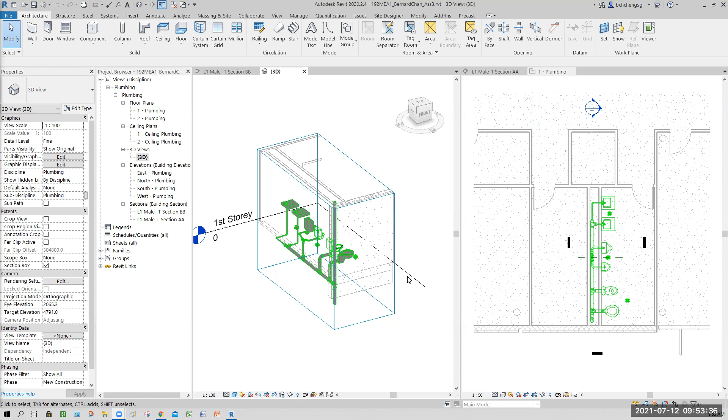Okay, so first thing first, I'm going to the view as per normal. So from here, since this urinal is done, I try to use this, or if not, this one can be deleted.

Okay, so these two guys, what is a space? Of course, normally when you plan all this adjustment, ideally it's center. So at least when you prepare the pipe segment, the section, when you cut, at least you can cut the same length. It's easier to manage that way. Normal kind of wastage lah.

Yeah, okay, so 340. So RP 340 divided by 2 is 170. Okay, so I'm going to offset 170 somewhere in the center.

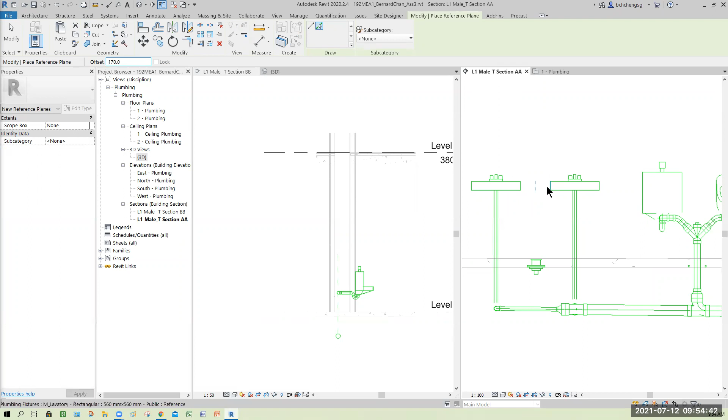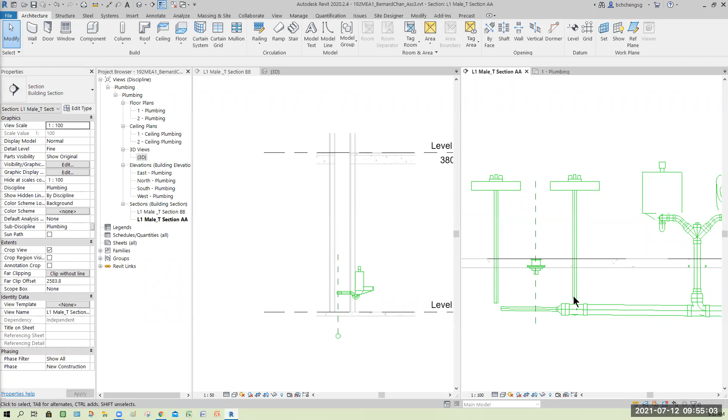Yeah, like that. Okay, now this part here I'm going to delete away because not required. This part here I'll maintain, but this connection here, adjust it, delete. Remember, we don't need that. So here, hopefully you guys can understand how this thing is connected.

Well, while you are dragging it, remember, not horizontal. Fidget a bit, you should get something like this. It says parallel and nearest. So from there, you get to maintain. The important thing is what? Your slope percent.

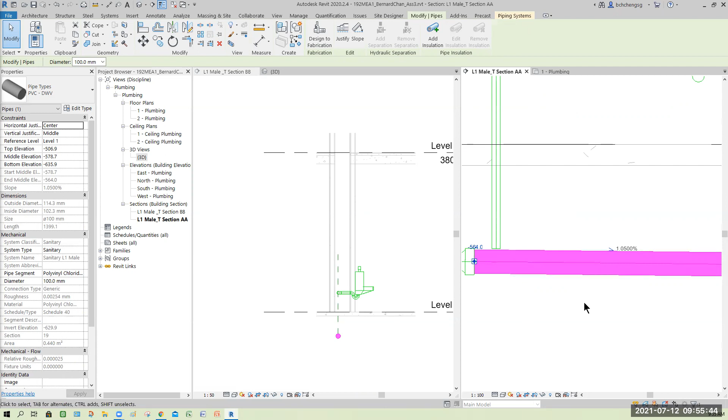Okay, slope percent achieved, that's good. Now sometimes if your pipe or this connecting fitting is too near, you might not be able to get the pipe size created. Okay, so all this you can shorten it.

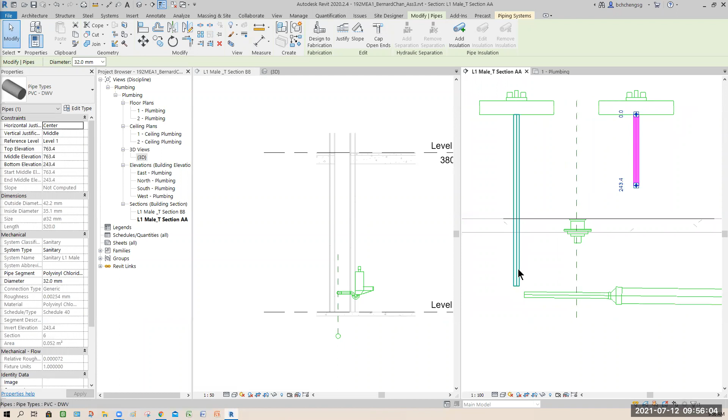Okay, so center to center. If I try to draw my pipe from here, okay, and see can I make it? See, this pipe is pipe size 32. Okay, so 32. If let's say the space allowed, maybe I'll get the size one size bigger. So this is good.

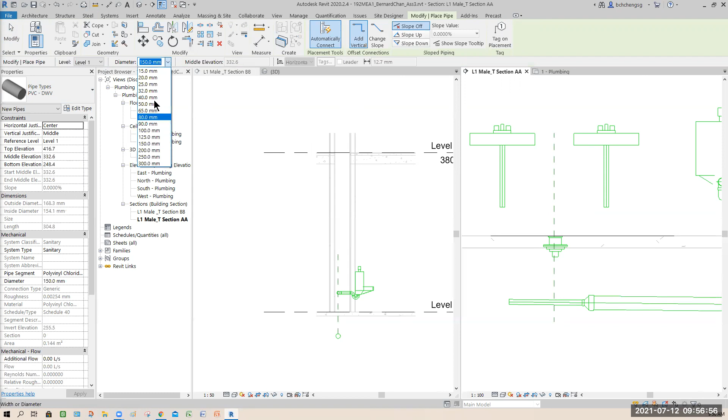40. So Santos, you tell me it's 40 just now, right? Yeah, good. So I'm going to get the pipe, which is the pipe. Where is my pipe? Here. Okay, PVC 40. Pick a point and you draw it.

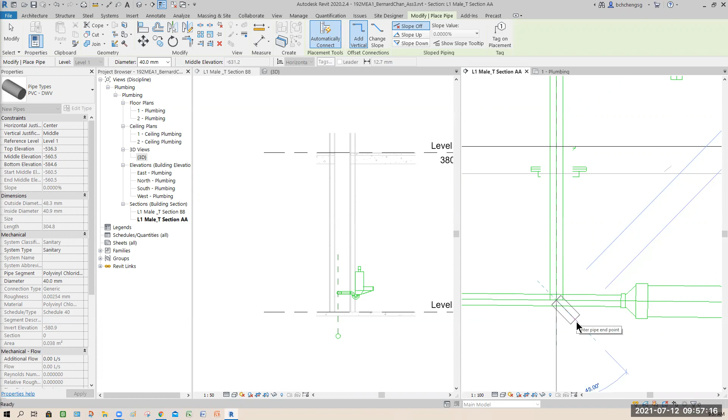Slope off. Slope percent 0. See, this is what I mean. When you draw like this, you can snap. I just don't get it connected. See, weird, right? It doesn't want to work. Interesting, right? Never mind, let me delete it away.

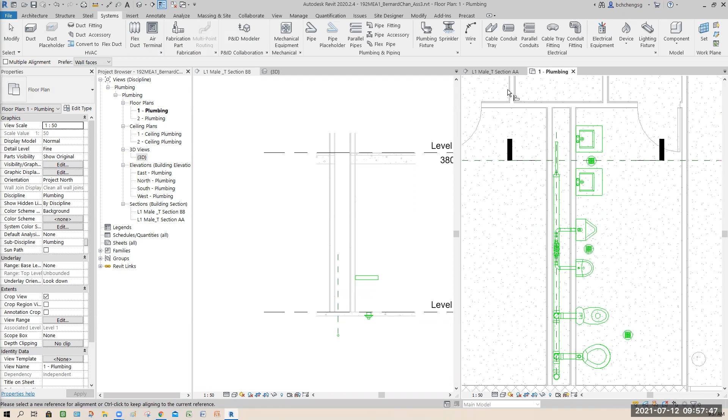Let's go to the section and change it. So from here, I'm going to align, AL, reference align. Go back again. Right through here. Now should not be a problem. Hopefully, it's still pretty tricky.

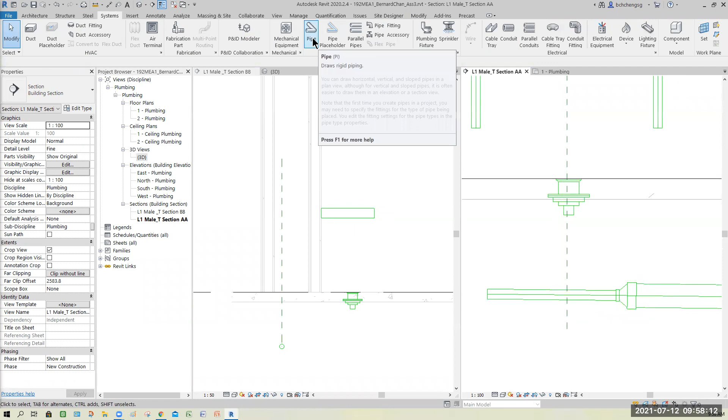Now, what is this pipe size? 32. I'm going to change it to 40. Then draw from here. Pipes 40. Highlight the view. Snap it. Hopefully that is connected. See, it works.

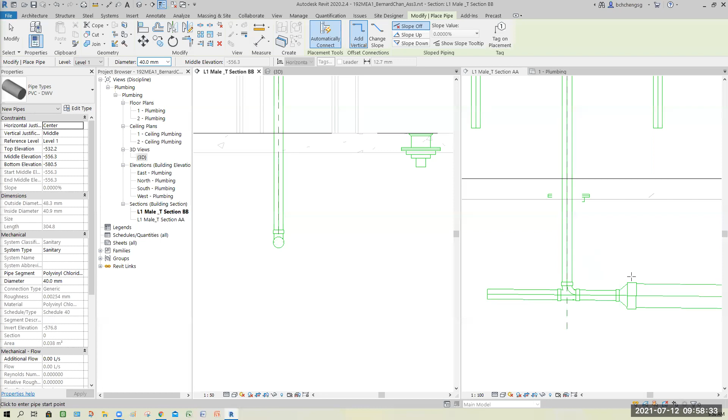Actually, the section AA is much more accurate, is better. So I don't know why. Of course, here you can change wider, also can. Why? You are supporting the flow smoother that way. But of course, sometimes it becomes too many pipe sizes. So it depends.

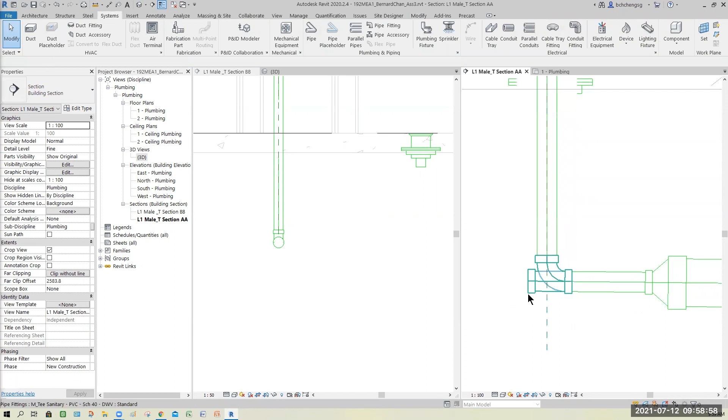All right, so done, no change. Delete this away. And of course here, remove your connecting. Unless you want to cater for expansions and so on.

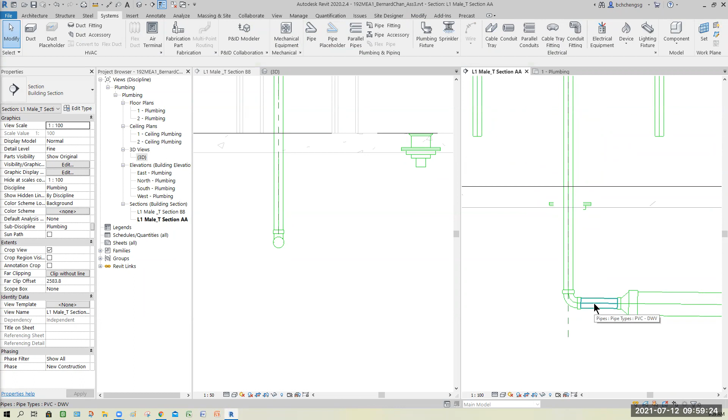Okay, so if you decide to change this in between pipe, maybe bigger, I'm okay also. Because the flow is supposed to be small, bigger, and bigger by right lah. But sometimes due to the cost, also too many pipes also create problems. Why? You have a lot of adapter, reducer, all these things.

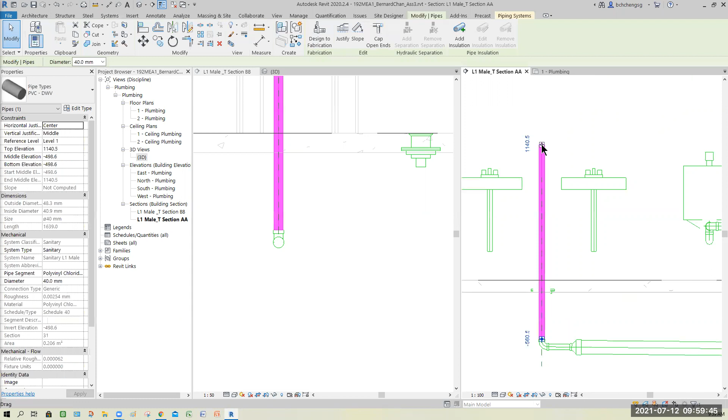Okay, so this is good. Lower a bit. Yeah. Then now I change back to one of it. Okay, so align. Am I too fast? Okay, right. Yes sir, okay.

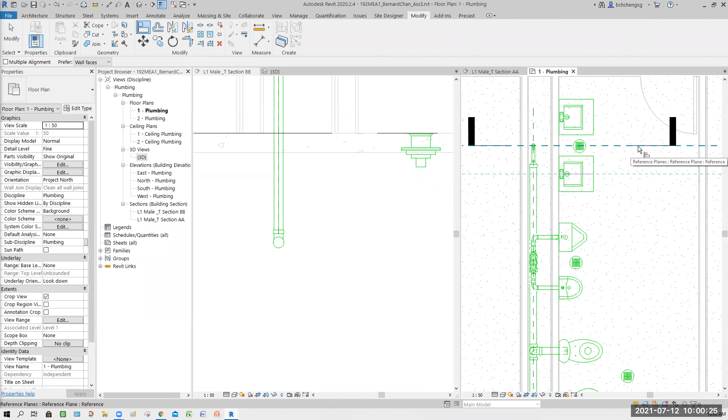So I'll go to modify, align, set the center, align my section line. But I can see sometimes it's quite difficult to adjust. So must use what? Tab key. Tab key is to toggle your selection. Remember, so once you set it correctly, then things will be easier. See, now connections is back.

Okay, once it's done, now you decide to plan. Okay, so first thing, you must have a P trap. So P trap, whether too high up or too low, that's because it depends on the accessibility and the view.

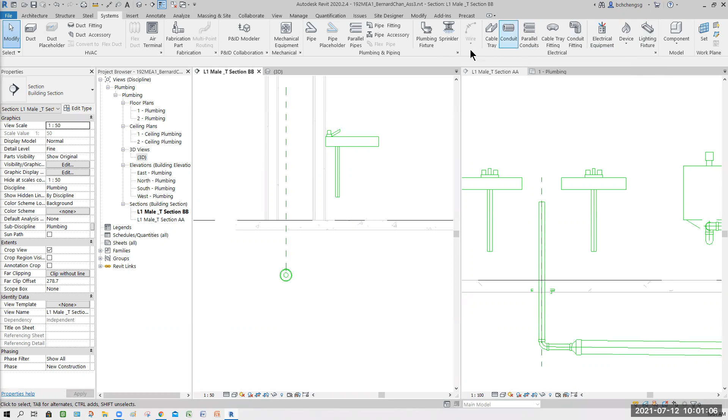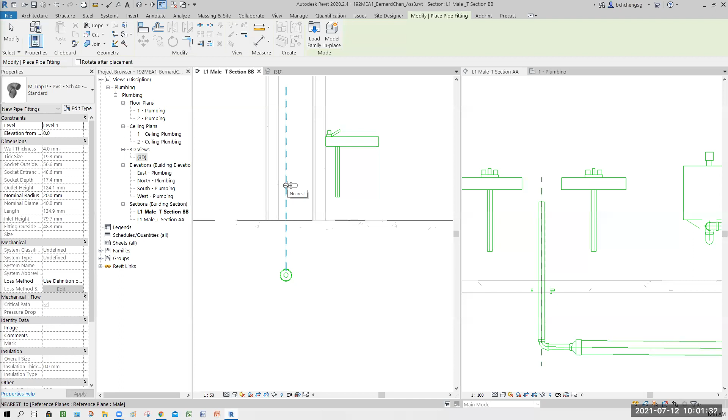Fitting, you need to select is the trap P, which is our trap P. In other countries, they're using this, like Japan, US, and so on. I think US is more or less direct. Japan has a trap, a U. Ours really is a P. Singapore one is a P. You see, the US one is an S itself. Yeah, so different countries use different stuff.

Okay, all this is not so-called right or wrong, you just set your practice. As long as it doesn't cause any choking, then it's okay.

When you start to adjust it, it cannot be too high up. Like the urinal, we adjust higher because there's no cover. Normally for a Singapore tap, like the vanity type, they have a wooden casing or some other precast kind of component they can conceal inside.

In that case, you've got to adjust the height because of servicing. How are you going to service it when there's a blockage?

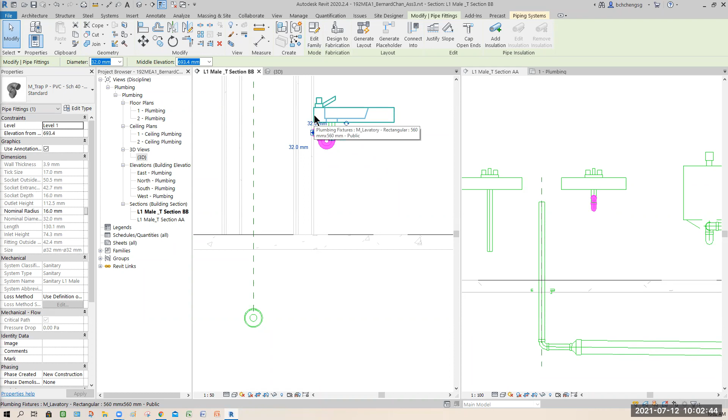So if I do something like that, that is too high up, right? Because remember, behind your sink there's a mounting bracket to mount the sink on the wall. So if you go too high up, you can't adjust it.

So this trap should be somewhere lower, like this. Yeah, it cannot be too high up.

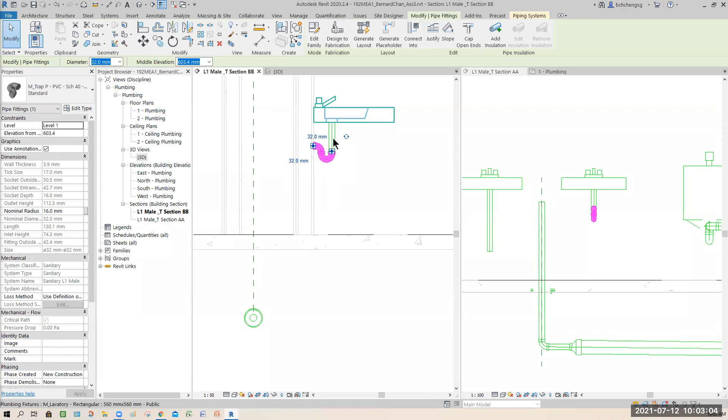Okay, take note that all this is estimated, right? At the end of the day it depends on the connection, because I didn't really measure it. But to me, sometimes you build things must be logical sense.

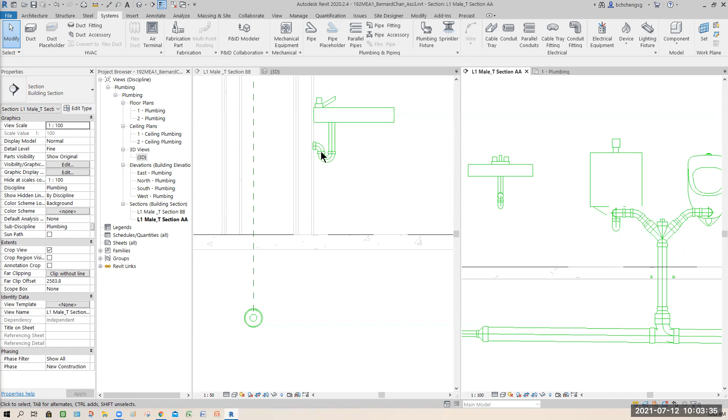Okay, now from here to here or connect to here is similar to what you are doing. But I want to show you something interesting, which is, since we have the advantage that they are both identical and the height is the same...

...I want to do something unique, because I mentioned before, right? If based on this the water goes straight, sometimes if the flow is not fast enough, it flows back, agree?

So here, no matter what, it must have a slope. But what happens? I introduce another trap here - it means an S like this, then go up. That means if the flow here is short, it pushes the suction.

You know, the water pipe, right, on top and below - if the water on top will auto flow to below, because of the gravity, you get what I mean? So actually it flows faster. You agree? Yes sir, this is physics. We go back to physics.

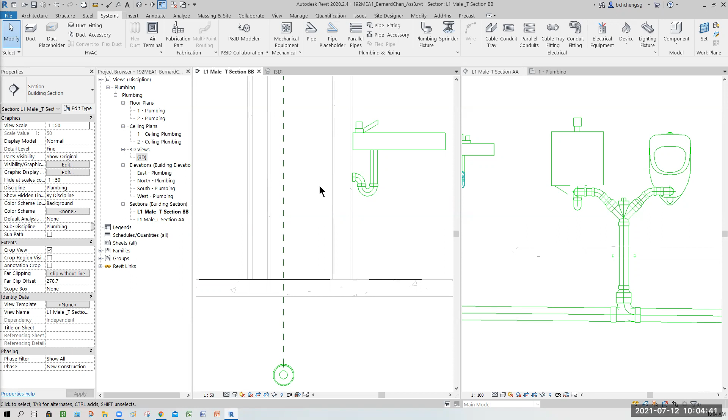So I'll do something special. Okay, see how you do it. Santos, yours is up to you - if you want to redo and try, go ahead. I just want to share it with you.

I will say not many people will design something like this, but I just want to explore. To me, since you are doing modeling, a lot of things are possible. All right, so slope down.

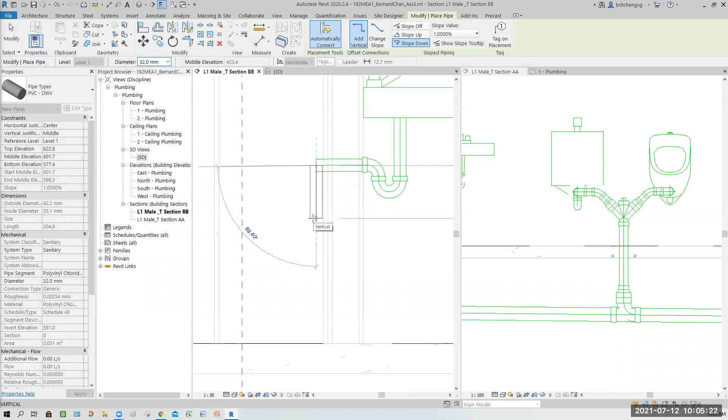It's just that sometimes it's how people want to do it that way. So if like this, I will bend out this. Okay, I think this one can be straight, need not to be sloped.

Let me undo, because not much is needed if the slope is only quite short. So let's say 1, 2, 3.

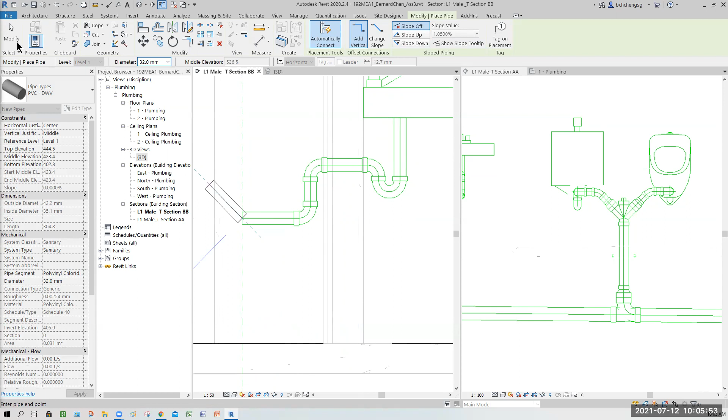Okay, then you turn it for here, you get what I mean? Like this. Of course, this part here, the mounting should be slightly out because the bracket cannot be inside.

For this case, we've got no choice because it's quite near, unless this design has the bracket outside. If not, this connection we've got to make bigger.

All right sir, which one did you pull, not the slope correct way? This one? Yeah. No, I didn't. Right, no I didn't - so for this case now, this is too inner.

I will just adjust it a bit, move it out. So it should be like this. Okay, this one we can't fix because of the design.

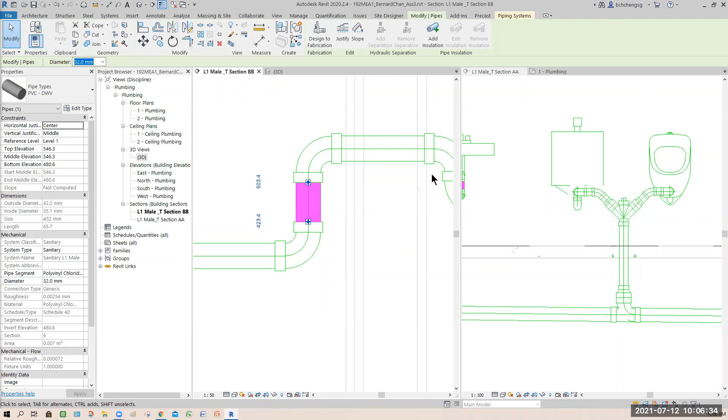See, this particular sink design in the US, they don't need this, so they can actually have one way out. Okay, but here, if possible, I will set it lower.

I will just double check how this connection here is. If it can go lower, I will set it lower, because okay, something like this would be challenging.

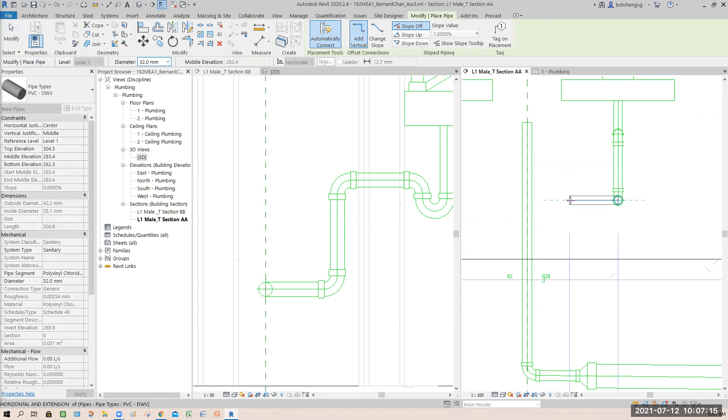Okay, so from here, right click, draw pipes. Somewhere in the center. Then if 45 can join 45, but now stop it.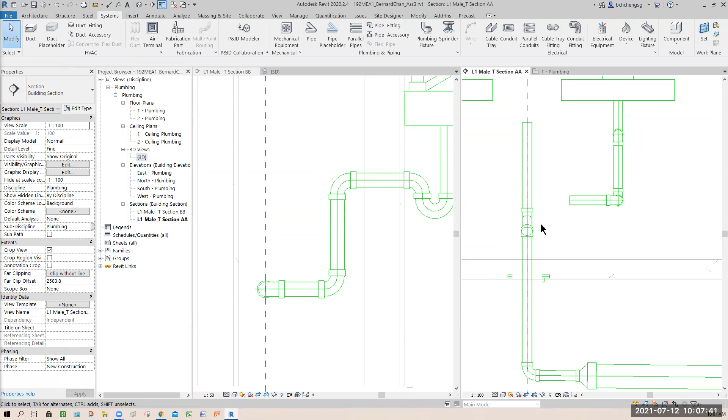Select, rotate, flip. Because this is in the cavity, up and down adjustment is all right.

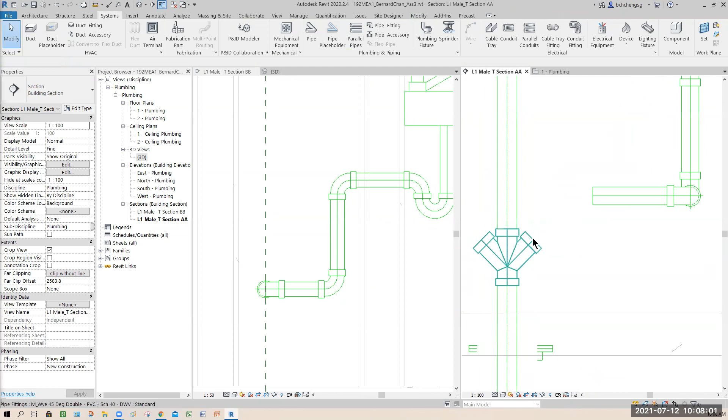The important thing is the flow - the water flow is important, critical. So select, point, right click, draw pipes, 45.

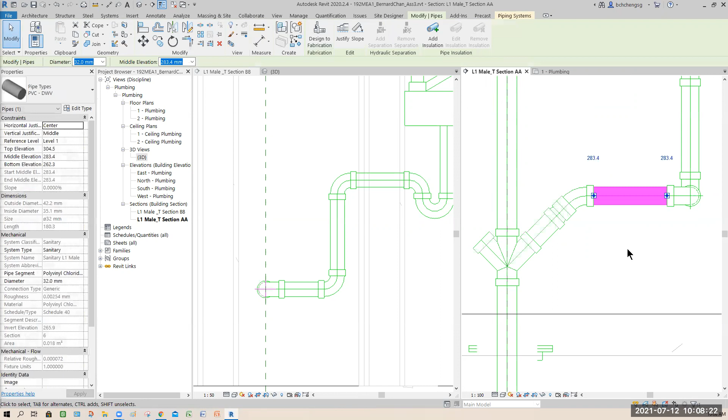Okay, so here, hopefully when I drag and join, it should... good, see that? Okay, so done, 3D. This is how it looks like.

You see, too many joints - as far as gravity is concerned, the leak risk is minimum, but for pressure pipe, try not to have many joints, normally. Because that gives a higher chance of leaking. Gravity pipe is not so bad. Yeah, so this is one of the ways also.

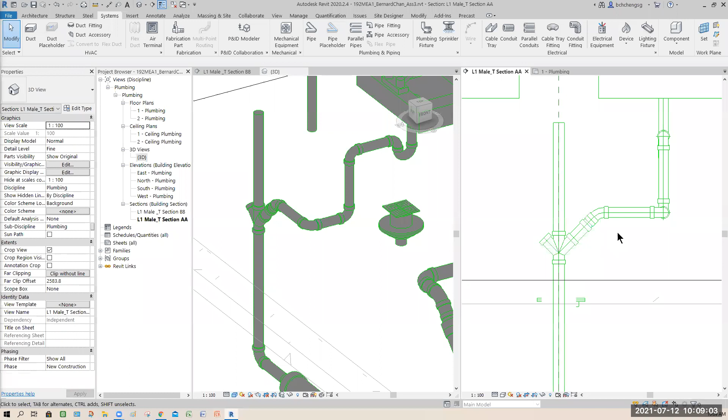Okay, so this is what I try to show to you all. If I lower it, the piping is even quite interesting. See, it's adjusting accordingly. See now? All right, so you guys decide how you want it - you do it this way or that way, all of this is not wrong.

But a lot of people, sometimes, as I say in this case - from here they turn directly, there's no in-between connection. That means this one is supposed to turn at the corner, in reality, but here the computer doesn't really accept that unless you want to rotate it yourself. It can be done - use the rotate function, you rotate. Or when you draw at the time, your pipe is at the angle immediately. So in other words, this and this, your alignment must be there.

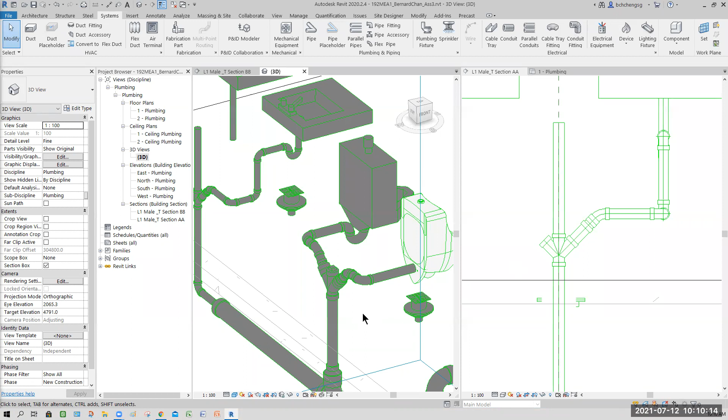Yeah, okay, of course this way looks nicer - it presents nicely, easier connection. So all this is always plus and minus. It depends on the installer, the guy installing it, how they want to get it connected. So all this, as I say, is not wrong. We are doing modeling.

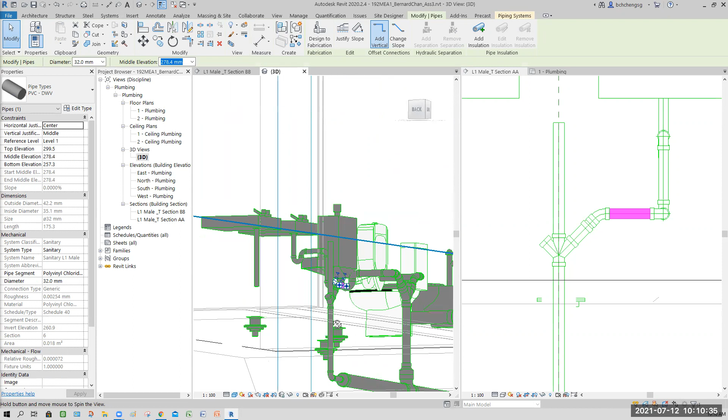What we are testing is like, hey, how do I do my piping. So with this type of design work, yes, you might say it wastes money, more materials are used, but at least the modeler understands - oh, this design has a logic behind it. Okay, yeah, physics, I will say that.

Okay, lastly, if you don't want to recreate it one more time, you can mirror. But one thing to bear in mind - if you do mirror, you could need some adjustment because you'll notice that the connecting components are not all visibly set correctly.

What I mean is, if I delete this away, I will mirror the whole piece over to that side. And you see what happened to the connecting joint - when you see the line disappear in some part, that means it's not properly connected. That will be a leak in the computer - I mean in their so-called own detection by the software itself. They're very smart, okay?

So let's give it a try. Window this, select it, mirror using this one - what is this one, this command, mirror pick axis. All right, so by doing that, you just need to select the reference plane and it mirrors to the side.

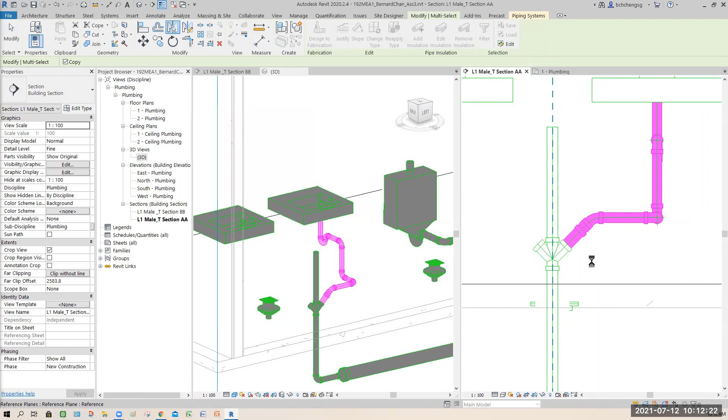So here it looks okay, but you see all the connecting parts - see the missing link, missing line, the missing line. Look at it, it's not properly connected because to the MEP connection, that means the system. Mirror is like cheating, because you don't represent the actual relationship between the parts and joints. So you've got to do adjustment.

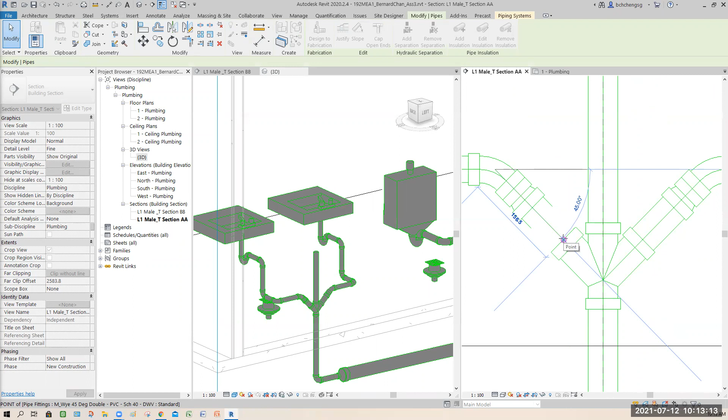So let's say, based on the current view I can see now, this one, you've got to select the pipe, drag it, and ensure that the O-snap connector point appears. Then you let go, and then it should now be connected. See? So this is the step you must remember to do.

If not, later, if you didn't do just the mirror, you go to analyze, you try to select the piping connection here, it says it's not connected. Sometimes it still does, but logically, when you do modeling, you must observe what you actually modeled out. Okay, don't let the system tell you, because we are only working with a small part.

In a real world project there's a lot - all the piping is all over the place. So you don't need to every time do the checking, right? You'll feel headache. All right, when you model, you understand the logic there, then you connect.

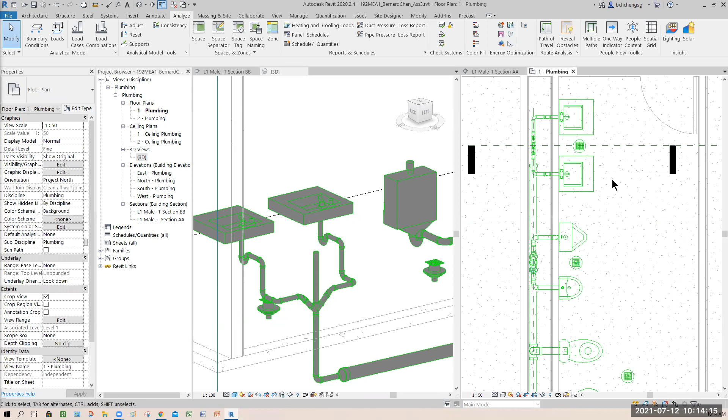So now I will see from here, from my other section view. So plan - I'm going to align my section line to this, all right, the last sync. So modify, align, center, center. So it's coming in.

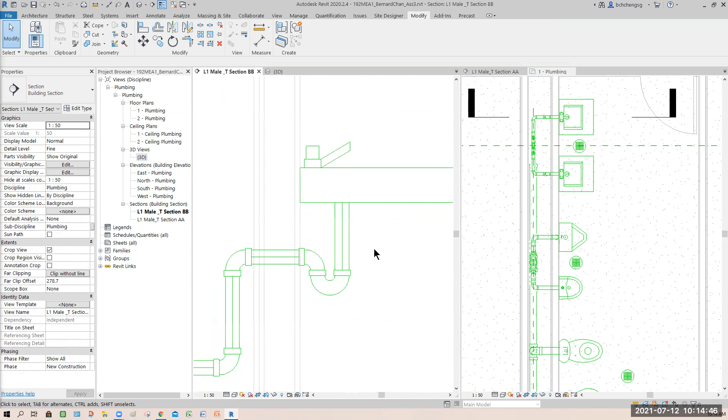See, it's not - look at it. Adjust it, point, let go. See, now it's done. So it's all good. Okay, so you're in 3D, we are good.

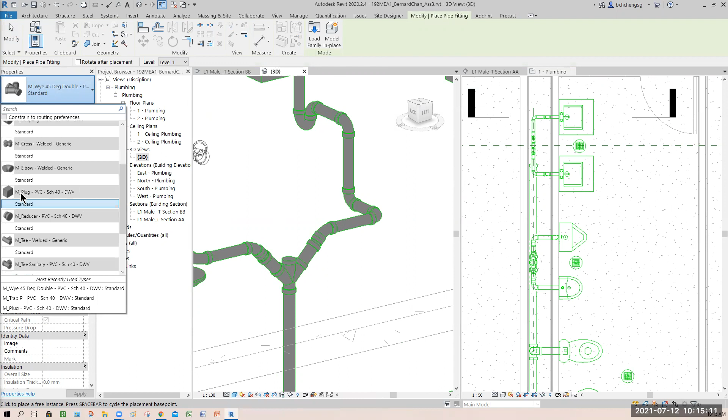This part here, delete, and you get the plug. Where - system, fitting, where's the plug? On top, I believe - yeah, see, M plug. Zoom in, snap - they auto resize, so no worries on that. Okay, so this piping is done.